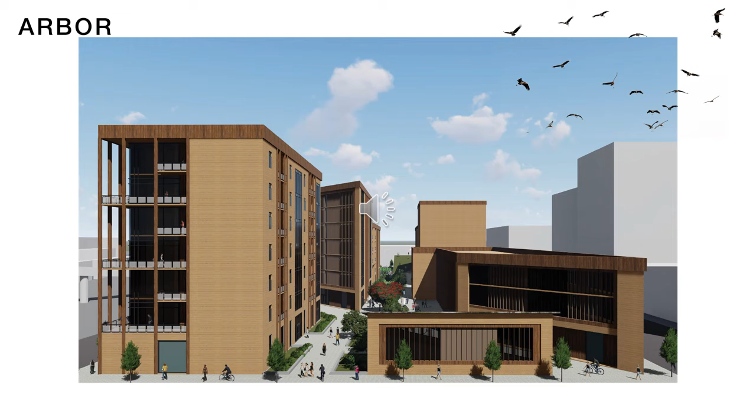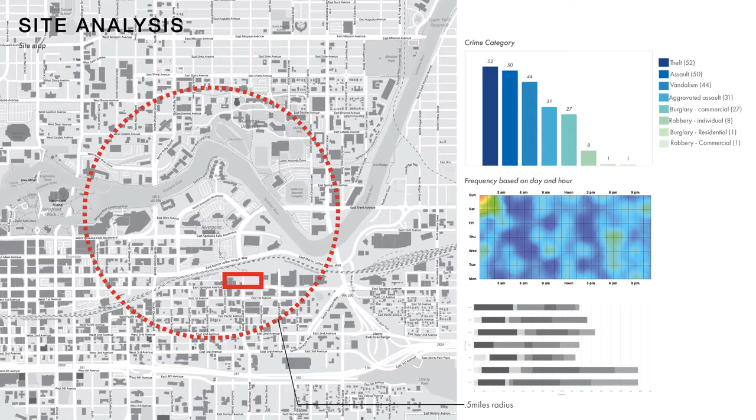The Arbor is located within the city of Spokane, and with the current population increase, which is leading to a high crime increase within the area, this design aims to evoke a feeling of safety by creating spaces that foster community relationships. Taking a look at the site and the current crime categories occurring around the area, the times they occur, and the current strategies the city of Spokane or residents are using.

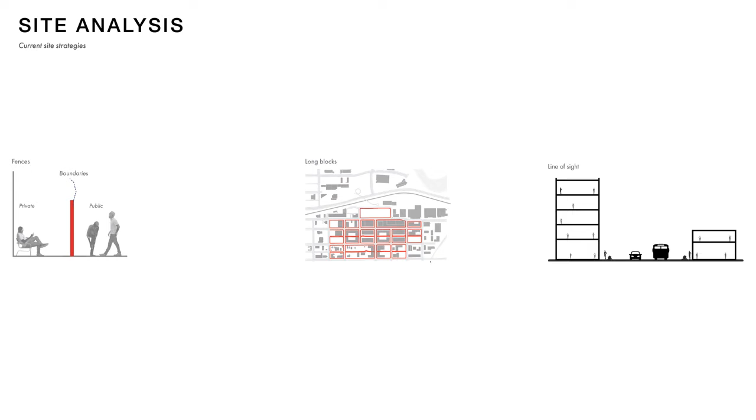They have boundaries and fences with long blocks, and line of sight is maintained. The proposed strategies for this are territoriality, access, and surveillance.

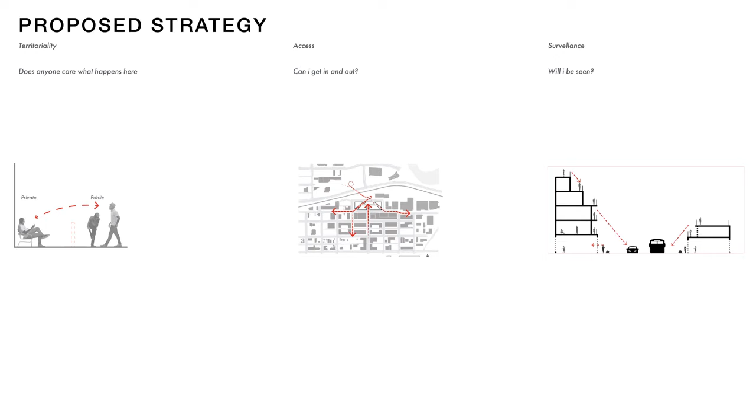Territoriality is giving access, making sure everyone knows what happens there, and creating shorter blocks that create accessibility and connectivity, opening up the spaces, creating balconies and terraces to have a view of the street, then massing it by creating long blocks, marking out the paths that lead to the street, opening up the paths to allow people in, and breaking up the massing into different layers to allow for optimal view of the street, creating community spaces on the roof and making sure there are cutouts within the building that allow access to the street.

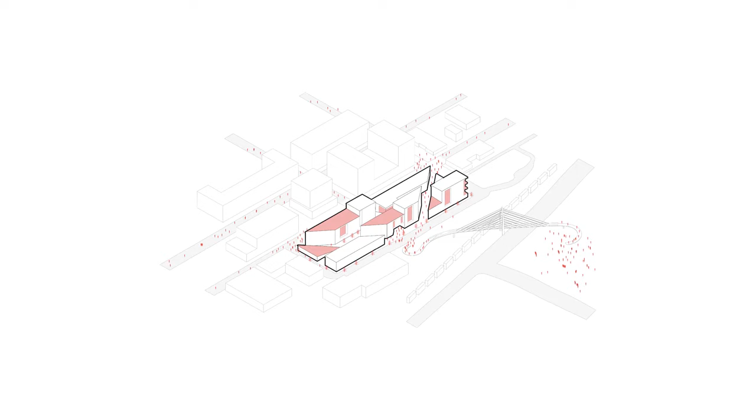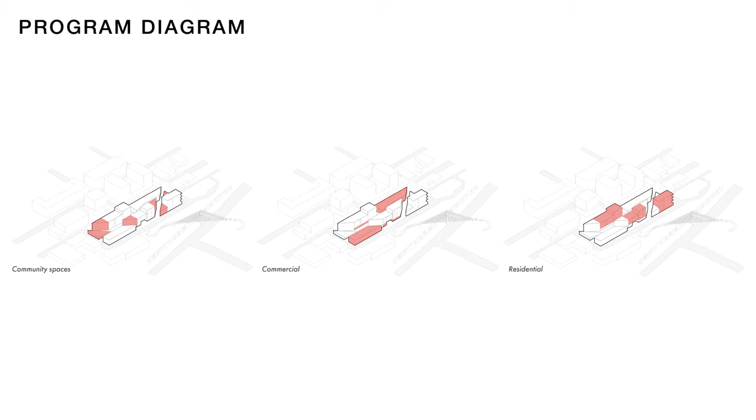Program was really important in planning this project. At the entrance of the Arbor, I have the community spaces and commercial spaces that are going to be occupied at all hours of the day. Above them, we have the residential units to evoke a feeling of privacy.

Moving on to the site plan, the site plan shows the paths that move across the building and how they relate to the street, to Sprague, and to Washington State.

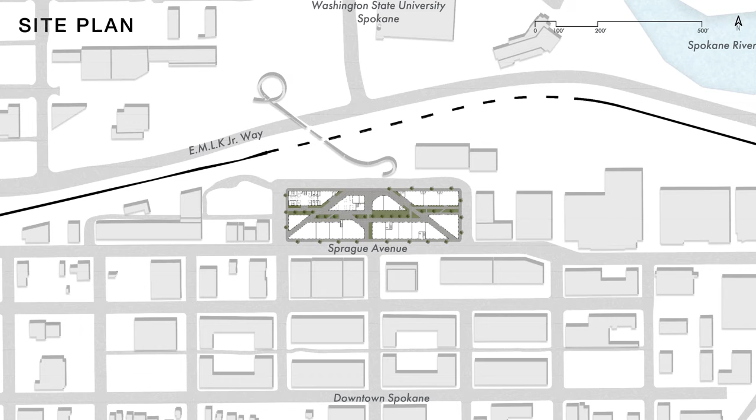Understanding the ground floor plan and the relationship, the entrances, and the relationship between the site and the building itself.

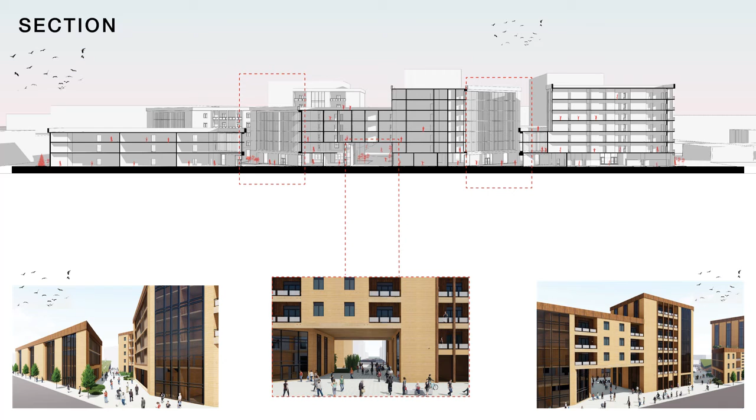Moving on to the third floor, that's where we have the residences, with a three-bedroom unit, one-bedroom unit, and a studio. At the entrance of each of these, the intention was to create an approach that pushes people in, but while you're moving through, you start to see activities that you get interested in.

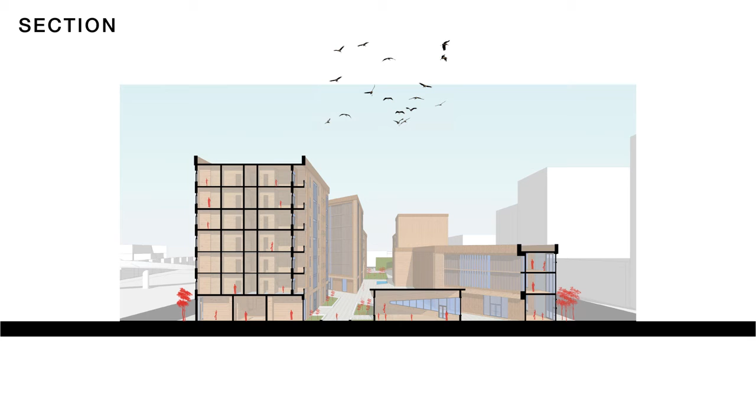Understanding this section, the balconies create access to the street, create access to activities below while creating privacy from others, but at the same time giving access to the exterior. This starts to understand the meaning of transparency in this project.

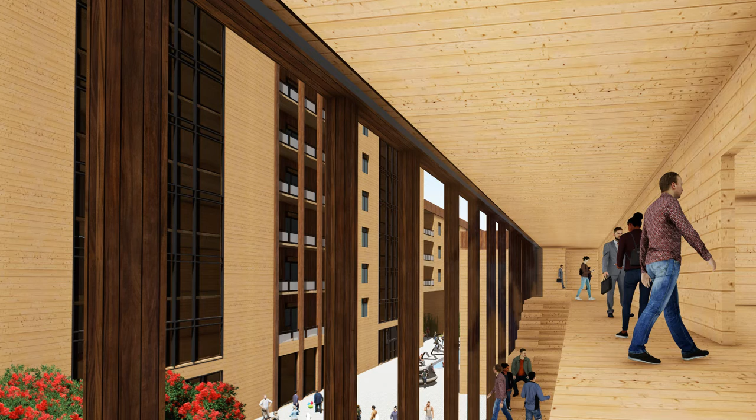Being within a residential or commercial space, you're able to see kids playing outside, their parents entrusting the neighbors with their kids, and understanding that even if you're within the office space, you're still able to see what's going on, having spaces to hang out with other people.

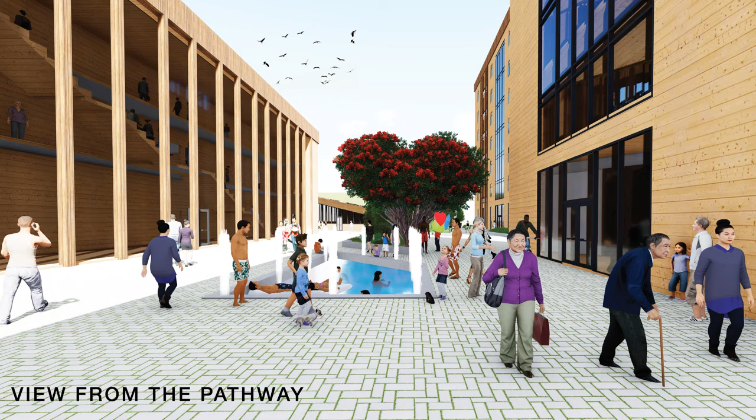Activities along the path are really important, making sure it's not just moving across, but moving across and having things to engage with. This is a view showing the pool and then a view showing the community garden.

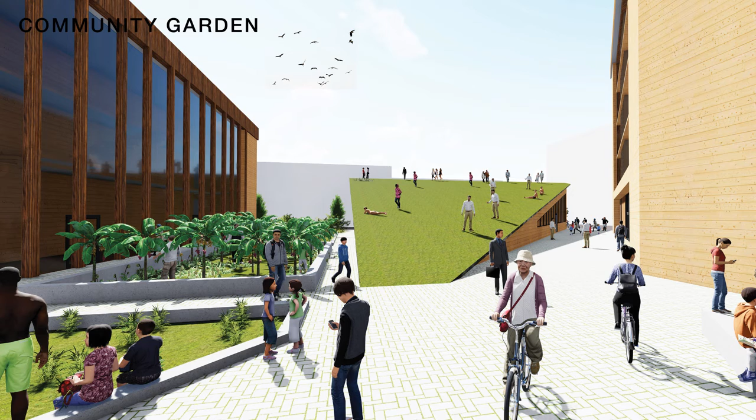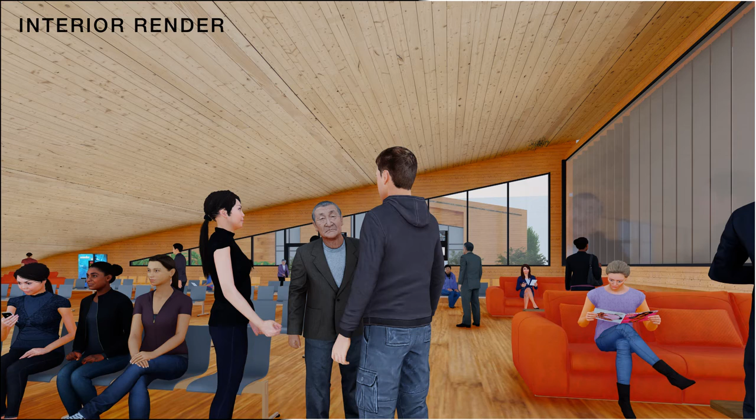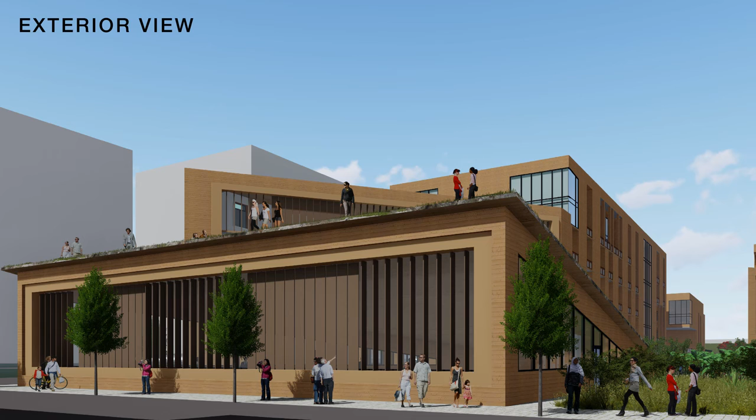Everyone can come to plant their basic needs, and then a place on the rooftop, one of the community spaces, the one with the green roof, where lots of activities can happen, and then a view from the catalyst building showing exactly how it looks.

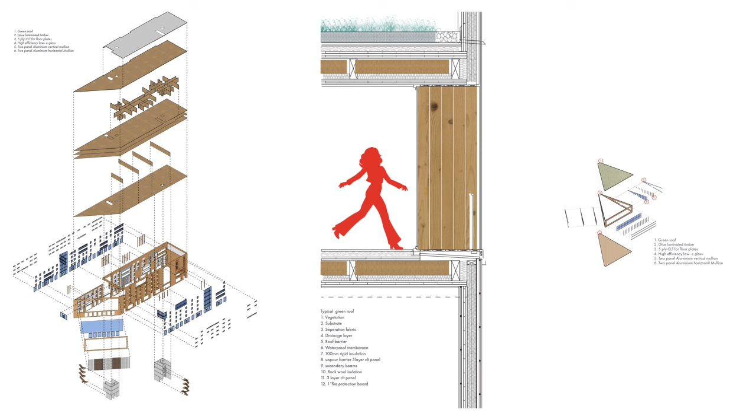The non-load bearing walls are 3-ply CLT panels. The foundations are going to be concrete, and the core is definitely concrete. For the green roof of the buildings that have a green roof, the major support is going to be CLT and glulam with lots of insulation and lots of support.